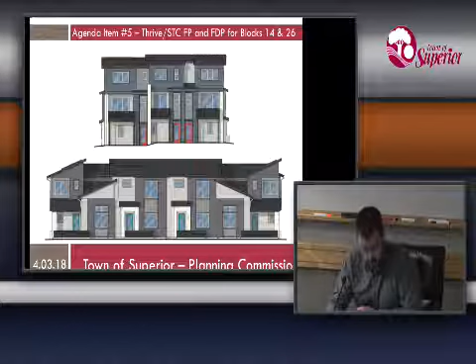Tonight's development application involves both final subdivision plats as well as final development plans for blocks 14 and 26 of the Superior Town Center. The images shown here are of each of the two product types that Thrive is proposing. Their 3-story stacked flat product is shown on top, and their 2-story courtyard design is illustrated below. Chase Mullen, our 3D imaging consultant, is here to walk Planning Commission through the 3D massing model that he's created after my presentation. The applicant, Jay Garcia of Thrive Homes, as well as his design consultants, are also here with a presentation of their own that'll follow Chase's fly-through.

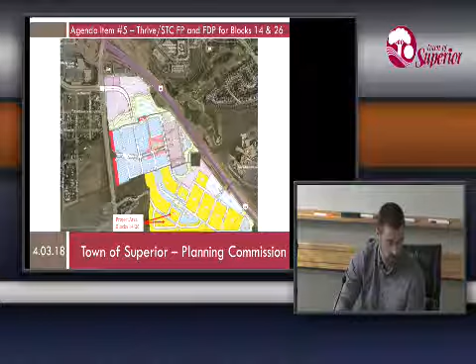The subject property is located within Planning Area 3 of the town center. As illustrated, blocks 14 and 26 lie along each side of Discovery Parkway as it comes south into the town center. Block 14 lies south of Promenade Drive between Village Greenway and Central Parkway. The proposed development area within Block 26 lies along Discovery Parkway just south of that right-of-way. The area reflected in yellow within this land use map illustrates the PD3 designation for residential, which includes the allowance for this development, including Block 14 and 26.

The land use map from PDA 3 also clarifies that the platting portion of this application was anticipated during the 2016 update, as streets 9 and 10 were approved to be added as public rights-of-way in order to accommodate the development of blocks 26 and 27.

As reflected in their context site plan on the right, Thrive is only proposing to develop the northern half of Block 26 at this time, in addition to all of Block 14. The associated plat for Block 26 has been confined to platting the right-of-way for Central Park Circle, which is the name that's been applied to Streets 9 and 10. The remainder of Block 26 and all of Block 27 will require additional subdivision plat or plats, which will be processed with an application for the development within these blocks.

The subdivision request for Lot 1, Block 14 would divide this 1.47 acre block into 32 developable lots comprising 1.05 acres and 3 outlots comprising 0.42 acres.

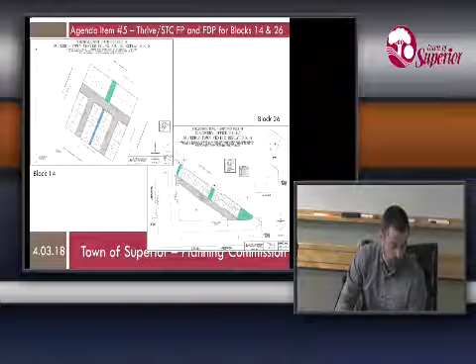The subdivision request for Block 26 is presently Super Lot 4, which encompasses a 5.78 acre area. They're proposing to divide a smaller portion of that into 19 developable lots covering 0.66 acres, as well as 4 outlots covering just over half an acre. The two super lots that will remain will be the remaining portion of Block 26 and all of Block 27.

The request for Block 14 would yield a density of 21.75 dwelling units an acre. As illustrated, lot sizes range from 784 square feet to 3,067 square feet.

The larger lots are sited along Promenade Drive and will front Village Green Park to the north, housing Thrive's courtyard units. The smaller lots to the south will accommodate Thrive's stacked flats, and they are aligned to face northwest or southeast, either to the adjacent public right-of-way or to the internal path illustrated in blue as Outlot C.

The proposed replat would create 3 privately owned lanes: Meridian Lane running parallel with Promenade Drive, as well as Anticline Lane and Canal Lane, which parallel Village Greenway and Central Parkway. All of these lanes are proposed to be within Outlot B, shown in gray. The other outlot, shown in green, is Outlot A. Their primary purpose is to provide a pedestrian connection through this block.

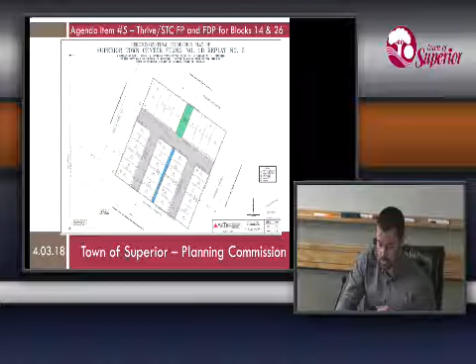The subdivision plat for Block 26 proposes to divide Super Lot 4A into Blocks 26 and 27, respectively, on each side of the proposed right-of-way. The northeastern half of Block 26 is proposed to be divided into lots 1 through 19 and outlots A through D to allow for Thrive's development.

The total density of this development would be 16.23 dwelling units an acre, and lot sizes would range from 1,040 square feet to 1,906 square feet. Each of the 19 lots proposed would front Discovery Parkway and be served by the private alley to the back, titled Incline Lane.

The other outlots, shown in green, are on each building corner and then kind of centrally located again to provide a pedestrian connection to Discovery Parkway.

The FDP cover sheet includes the required submittal components, including project title, legal description, vicinity map, and signature blocks, as well as the sheet index.

It also includes several tables that outline various development components. The site data table, enlarged on the right, clarifies the land use distribution and the proposed setbacks and building heights.

Both housing types as proposed will fall within the 32-foot height maximum. The courtyard model illustrated on the bottom left will be roughly 27 feet in height and 2 stories above grade with a basement. The stacked flat product illustrated on the top right is 3 floors in height and will stand 31 feet 7 inches tall.

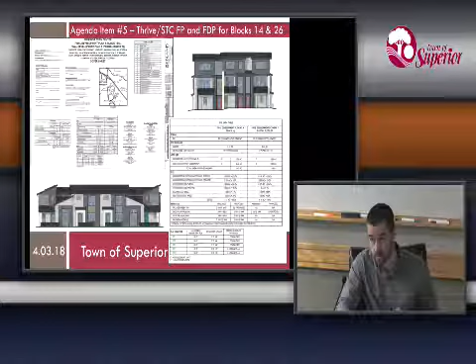Parking tables were also included on this cover sheet to clarify both the number of private garage spaces and guest parking spaces for each development block. Both product types proposed have a 2-bedroom unit with a loft area. 1.5 parking spaces are required for 2-bedroom units within the town center.

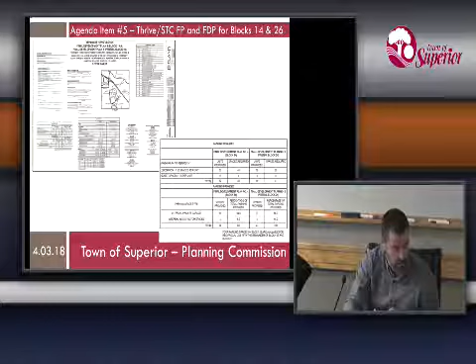For the 32 residential units proposed within Block 14, 60 garage spaces and 4 guest parking spaces are proposed, compared to a requirement of 48 private parking spaces and 4 guest parking spaces, so it exceeds the standard. For Block 26, 37 private parking spaces are proposed and 6 additional guest parking spaces, against a requirement of 29 private spaces and 2 guest parking spaces. So for both blocks, they exceed their parking requirements.

A context site plan is provided to illustrate the broader context of how the 2 blocks relate to one another as well as to their surrounding area. Vehicle access to these blocks would originate either from Main Street off McCaslin through the town center, or off of Discovery, which is a little bit more of a direct access to this area of Planning Area 3.

Street and infrastructure FDP approvals to date include all of the adjacent residential or adjacent roads. As illustrated on this plat sheet, vehicle access to Block 14 would come off of either Village Greenway or Central Parkway in these locations, or one of 2 locations off of Discovery Parkway. Access to Block 26 would come off of Central Park Circle in these 2 locations. The plan sheet also illustrates the pedestrian and ADA access routes incorporated into the design.

For Block 14, accessible pedestrian routes encircle the property and have been accommodated within the central connection between or over Outlot C and Outlot A. For Block 26, it's just kind of circumnavigating the site. This outlot, as well as all of the residences along Discovery Parkway, rely on stairs to get up to them, so this route is there for pedestrians, but it's not ADA accessible.

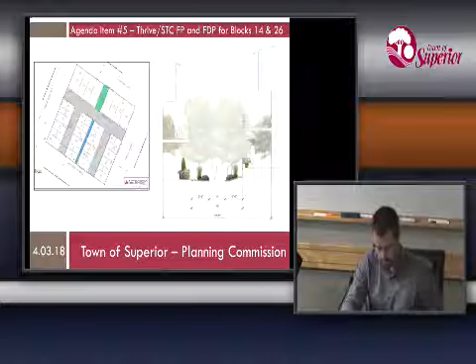Thrive's stacked flat product, which abuts Village Greenway, Central Parkway, and Discovery Parkway, is subject to the 2-foot to 8-foot right-of-way setback. Lots fronting Central Parkway are requesting a minor deviation to this setback for an additional 6 inches, to accommodate an electric easement that runs along that edge of the block. They just need an additional 6 inches to get out of that easement.

They'll also use that to help take up some of the grade to get up to their building elevations for those lots. Lot widths within the stacked flat range from 16.5 feet to 27.5 feet. Only 4 of these units are proposed at the 16.5-foot width, which will feature one-car garages. The other 20 townhomes, as well as all of Thrive's courtyard product, will include two-car garages.

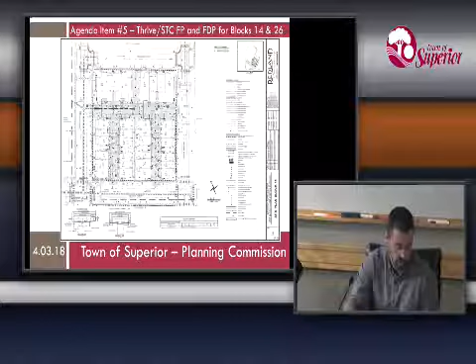The design of the private drives on Outlot B was based largely on fire access requirements, which require a 26-foot wide paved access, as well as 32 feet of building separation on those alleys.

The site plan sheet for Block 26 is shown here. It relates the same information that I just discussed for Block 14. Thrive is only proposing their smaller stacked flat units within this portion of Block 26. The plan sheet illustrates that the 19 units would be accommodated within 5 buildings: 2 with 3 townhome units, 2 with 4 townhome units, and 1 with 5.

Each building is designed to face northeast and front Discovery Parkway. Front setbacks are proposed to range from 16 feet to 24 feet 5 inches. The front setback standard for this area, again, is also the 2 feet to 8 feet.

An exception is being requested for this portion of Block 26 to account for an elevation variation between where the Discovery Parkway right-of-way was built and where the foundation grades are for their buildings. A series of stairs will be required to access each of these units. Staff has no concerns about this exception request, which was brought up at their concept plan meeting.

We've also worked with the applicant to assure that the front yards within these lots have been appropriately designed. Lot widths within Block 26 range from 16.5 feet to 30 feet. Only one unit along Discovery Parkway is proposed with the 16.5 foot width, which will include a one-car garage. The other 18 townhomes will have 2-car garages.

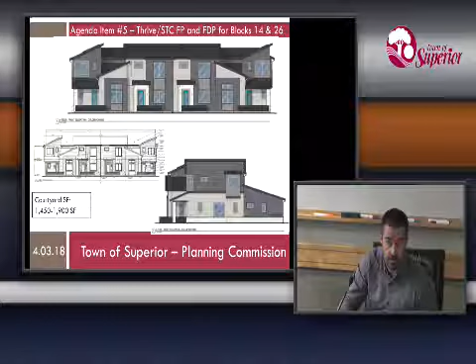The front elevation clarifies how the end units are distinguished from the interior courtyard product. Gable roof pitches define the interior units, while shed roof angles characterize the end units. The second floor shed roofs are also designed to accommodate solar panels. Stone has been incorporated around the building entries of the interior homes and is used to define the first corners of each building as well. Front building entrances in each courtyard product have also been incorporated.

The left side elevation here is virtually a mirror image of the right. The only difference is the utilities shown on each side elevation. On one end of each building, they'll cluster their gas utilities. On the other, they'll cluster their electric utilities for each of the 4-plex buildings. The roof elevation on the left, which will also face south, is shown to incorporate their solar panels as well on their black and white elevation.

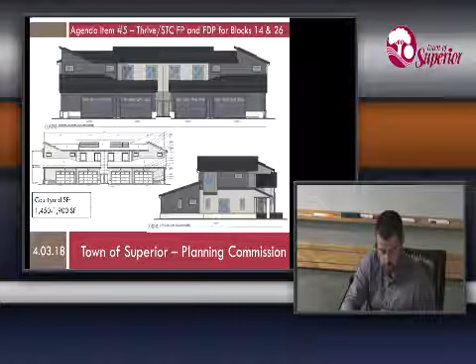The rear elevations illustrate that additional solar panels will be included on the interior units, and they also clarify how you get access to those interior courtyards, which is through a break between the 2 interior garages.

The 2 elevation plans provided for Thrive's stacked flat product reflect a 3-unit building cluster. For Block 14, only 3-unit townhomes are proposed, but within Block 26, Thrive is also proposing 4 and 5 unit buildings. Thrive's 3-story townhome would stand roughly 31 feet 8 inches in height, and have a depth of 40 feet and span roughly 60 feet in length in the arrangement shown.

The front building elevation clarifies the mix of colors and materials proposed. Stone columns have also been incorporated into this design. They help define the building corners and also separate internal units from external units. Stone has been included on the right side elevation as well. The second floor of this elevation features a bay window.

Like the courtyard product, Thrive's stacked flat includes 3 distinct composite siding finishes: a narrow and a wide horizontal lap siding, as well as a composite panel board siding. As detailed in the applicant's project narrative, Thrive would prefer to design their stacked flat product at a taller height of 35 feet 2 inches.

This design would allow for an enhanced solar exposure and provide each level of their 3-story product a more generous and welcome floor-to-ceiling separation. This request would require a minor 3-foot 2-inch exception from the 32-foot height restriction that applies to blocks 14 and 26, but their development would still be compliant with the applicable view shed restriction from Tract H. The visual impact of this allowance would be minimal from the exterior, but would result in a distinctly more spacious and marketable product from building interiors.

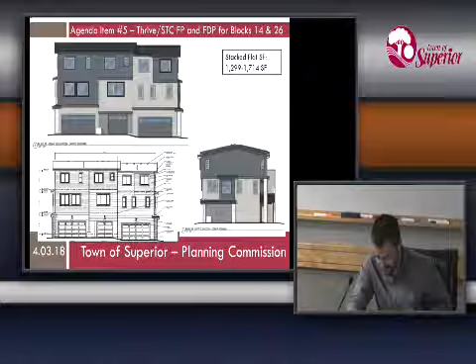Solar panels are not reflected on this elevation, but depending upon the orientation of the units, some stacked flats will have solar panels visible from building fronts, and some will have them visible from the rear facades. Staff has worked with the applicant to provide variation in wall planes on each of their elevations, shown here and here. But Thrive has also clarified that each protrusion runs counter to their company goal of maximizing energy efficiency of their products. So the proposal reflects the balance struck between the aesthetic appearance staff is concerned about and the energy efficiency that Thrive strives for.

The landscape plan shown here for both blocks illustrates the proposed landscaping within the defined area. The applicant has indicated a desire to expand on the design guideline plant list with additional plant varieties to better respond to the specific site conditions, such as shade and tighter planting areas.

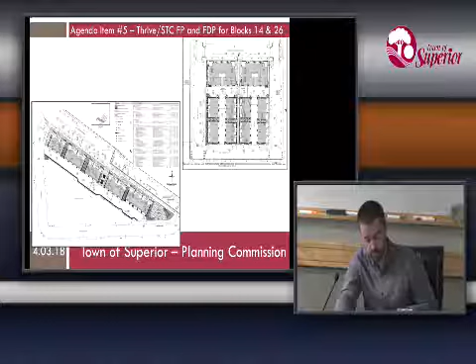A detailed narrative of each of their exception requests was provided by the applicant and reviewed by staff. In short, staff finds the landscape plan meets the overarching streetscape and landscape goals of the STC, which require that plant choices be attractive, sustainable materials, and support a vibrant and active public environment. Staff also finds the proposal will provide year-round interest in both form and color.

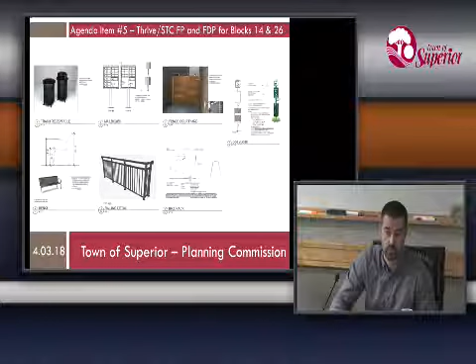The other site amenities are shown here. They're consistent with what we've seen elsewhere in the town center. Most of these are public amenities, with the exception of the fenced courtyard detail and the railing detail, which will be done on private property.

Staff is recommending approval of this application according to the conditions outlined here. As you know, should PC have any specific conditions to relate, they can be added to this list.

As noted in this presentation, Thrive is requesting a handful of exception requests to both setback and height. PC can respond to these requests directly through conditions or by directing staff to include PC's position on these issues through staff's written summary of this meeting that will be updated for the town board.

That concludes my presentation. We will turn it over to the more exciting stuff.

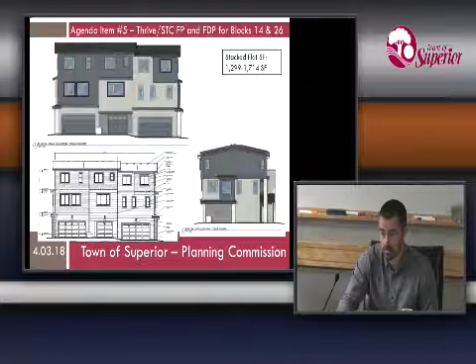All right, thank you, Stephen. Before we go on, though, we have questions for staff at this point in this presentation. Okay.

All right, is this our 3D? Okay, good evening, Chase Mullen with MIG.

I'll just do a kind of quick flyover and then ask for specific direction about views you guys would like. Just to help orient you, this is block 26 here, and this is 14 over here.

Those are at 32. What is the elevation gain just in the ground from on the south side of Central Park Circle? Does that grade lower? We don't have the final grading yet for kind of the 27 area, but I did absorb some of the grading from the road.

So it's close. Yeah, I mean, Central Park Circle is higher in elevation than those adjacent properties under consideration tonight. I'm just wondering, I can't remember if the grade -- this all slopes down to the north, and I'm assuming this does too. They had to pick up, and I don't know whether or not --

Jim Brostovich is the one working on the application. He's the civil engineer working on the application for Remington, which will come in with an application for blocks 26 and 27 later this year. My understanding is that the grade's higher south of Central Parkway -- Central Park Circle, excuse me.

They've clarified part of, that they're planning on coming forward with a front-loaded product off of Central Park Way, because they can't share that alley due to the grades. A lot of that grade change between the south side of Central Parkway and the north side, as well as what's on Discovery, is absorbed within the center of Block 26.

Anything additional? Would you be able to put the proposed development back in and give us that same view from the east and south that we had before, from the backyards of those homes? Yeah, I'll start on this end. Going up here a little bit.

Oh, that's perfect, thank you.

We'll keep Chase here just because we like his company. So if you guys have any other questions for him, we can follow up if you guys want to move to the applicant's presentation. Any more questions? I'll have questions for staff, but I'd like to hear that. Okay. Yeah, that's fine. Sure. Do we have a copy?

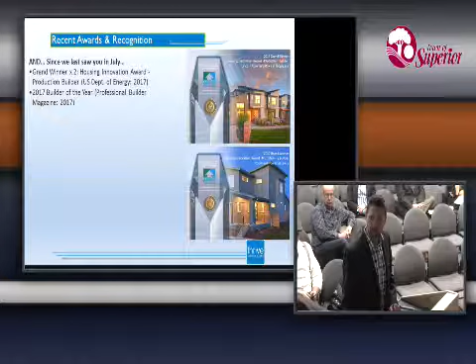We've won it the past 5 years in a row, but this is the first time we actually entered into 2 of the 4 categories, and we won them both. So we now have 6 awards. And then the other really exciting award is that Professional Builder Magazine named us Builder of the Year in the entire nation. So that was not something we actually applied for.

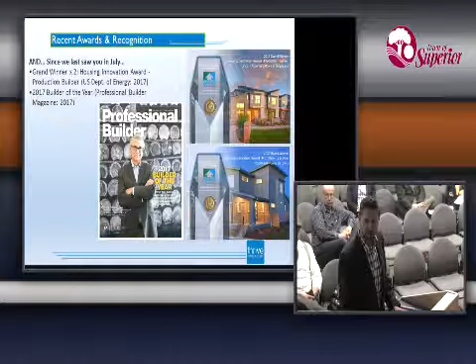We weren't trying to get this. They just kind of came out and told us, you guys are the Builder of the Year in the entire nation.

So what does that really mean, and how does that apply to this community? I think that we're really geared towards energy efficiency, sustainable power and energy, healthy homes and cleaner air, and what we focus on, what our pride is, the science of building.

So what does that translate to here in downtown Superior? It's going to be the sustainability that we're able to implement, high design, urban density, and walkability.

And why downtown Superior? I think it kind of goes without saying, but it warrants mentioning. Just the focus on environmental stewardship being within the town of Superior, but also kind of trying to be that cutting edge of innovation as well. And then also the healthy living and how that integrates into and around the community itself.

So we're just really excited to be a part of the Downtown Superior project. It's cool to go out there now and just see how it's started to take shape even since last July. And, mentioned this last time, but downtown Superior, the town of Superior in general, being 2017 best place to live in Colorado, as labeled by Niche.

And what I think is really cool is that the town of Superior has these goals out there for sustainability, for environmental stewardship. Not every municipality or jurisdiction is willing to just put this out there like that and have their goals labeled on the website itself, and have a robust green building program. They have these initiatives and programs that they're seeking to launch to be acknowledged as being a solar-friendly community.

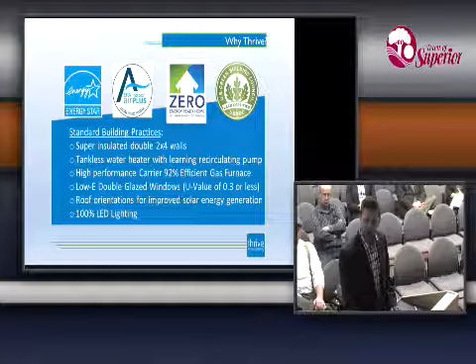So this is very approximate, and I have to throw out the disclaimer, but how we have these currently designed in the energy modeling software that we've run them through the science of building technology, we believe that these homes will score 32 or less on the HERS rating score, so I'll talk about that a little bit more in a moment.

Have over 20% reduction in energy usage as compared to the 2015 building code, which is the latest and greatest building code. Have actual negative CO2 emissions with the solar, over $700 a year energy savings versus existing U.S. homes, and then the average monthly heating and cooling cost of less than 15.

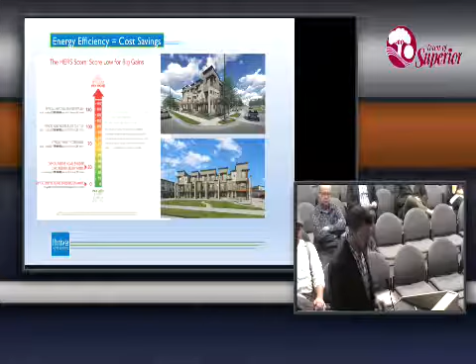A big disclaimer on that, but we think that it's actually going to be lower than that, but we just want to obviously assess the fact that this is still in the design phase. We want to see how it ends up being built, but it's pretty accurate software, so we're excited about it.

This is the HERS rating score, and we've kind of made it graphic just to illustrate the idea here. I don't know if there are any Masters fans in the house, but with the Masters coming up here, the lower the score, just like golf, the better.

So up here, the 130 that's kind of at the top of the chart there, that's a typical existing Denver resale home. This is the typical new home that's just built to code, so just the bare minimum and not be breaking the law.

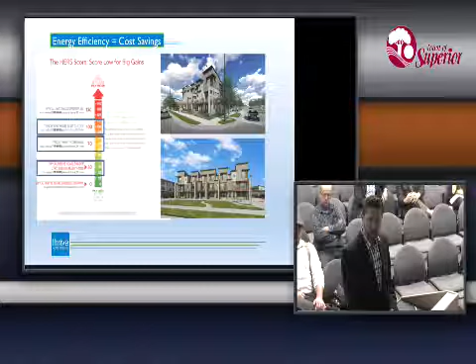This is an Energy Star home, which we plan to meet and surpass. And then this is where we're going to end up, right in that 30 range. This is a typical Thrive Home Builder zero energy ready home, which these are slated to become. So that's kind of the background on the design aspect.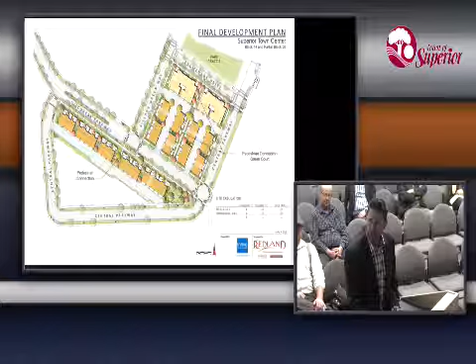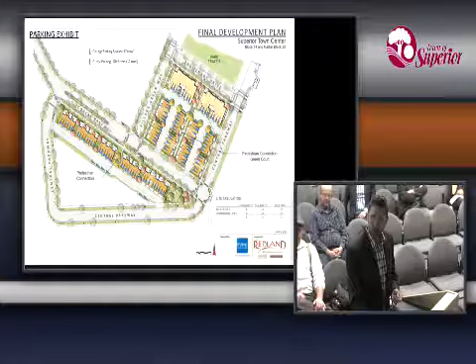Stephen did talk about the parking as well, so I don't necessarily need to go into the details of that, but this is an exhibit that just shows the actual garage parking and then the guest parking off street. So 97 total garage spaces and 10 off-street guest parking spaces.

These are the areas that have been designed and allocated for snow storage within the blocks themselves. This is the overall site data table, and I'm highlighting here at the bottom the setbacks in the areas where we're actually going to be requesting additional setbacks.

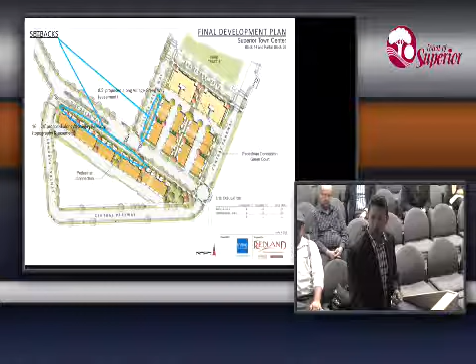Again, this area along here, there's a high voltage utility easement, a lot of energy going along that area, so we wanted to set back an additional 6 feet just for an offset of that easement. There is also an easement here, same easement, it takes a turn here, so it's that same 8-foot wide easement.

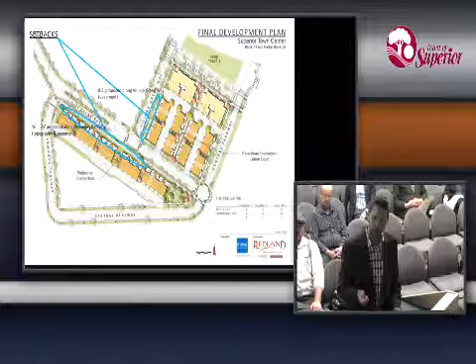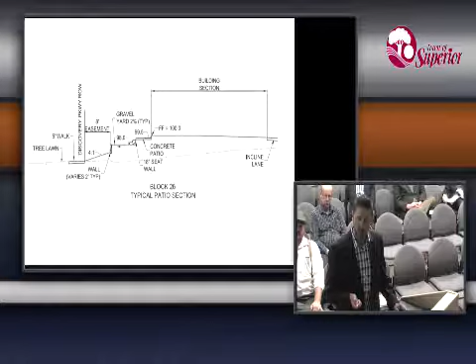But this is the area that we were referring to that has significant existing topography and ultimate grading buildout that will really allow us—here's an example of the typical setback from Discovery Parkway. It gives us this opportunity to step down, so we have these terraced retaining walls that then transition down to the street right of way and tree lawn.

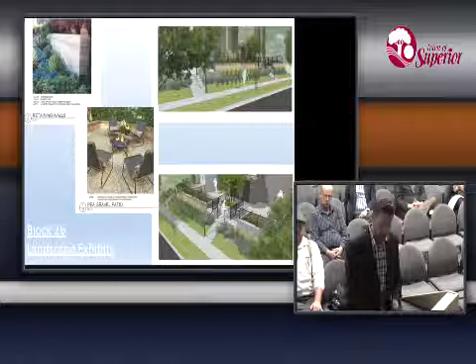And as Stephen alluded to, it gives us this real cool opportunity to extend the private outdoor living space for those units that front onto Discovery Parkway, have a fenced-in location where Fido can use the restroom, or you can program in some more active outdoor living for yourself. We took what was a site constraint and turned it into a design opportunity, and we're very excited about how that's going to turn out.

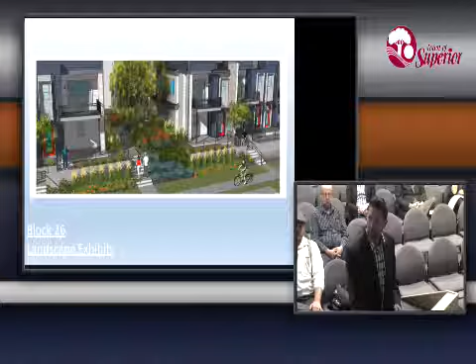I think that Chase's fly-through gave a good concept of it as well. This is just a general rendering that the civil engineer and landscape architect were able to come up with to give a feel for that area.

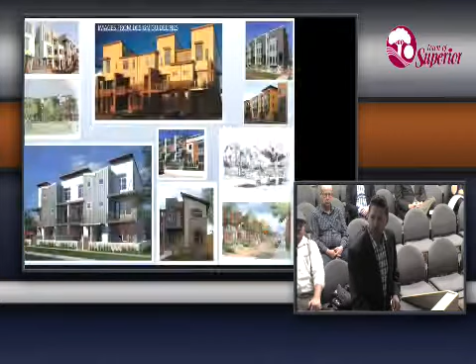Now I'll transition over to the architectural design. We began this process even before we talked to you last July, and delved into the design guidelines, and took a look at the different product types.

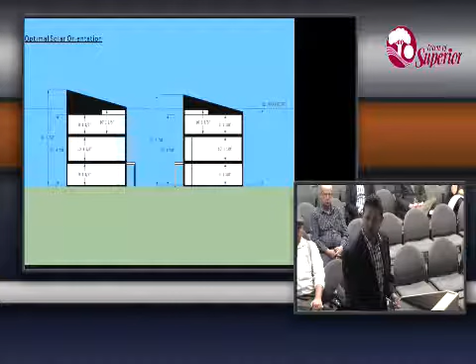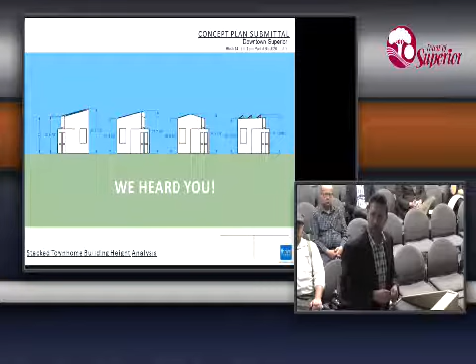As you may recall, we presented how this monoslope roof pitch offered optimal solar orientation, which gave us an opportunity to maximize the area of solar photovoltaic. We presented massing models showing that, ranging from about 38 to almost 40 feet in height, and showed different alternatives based on a maximum height of 32 feet. What we wanted to show you today is that we heard you, and we are progressing with what we heard that evening and since then.

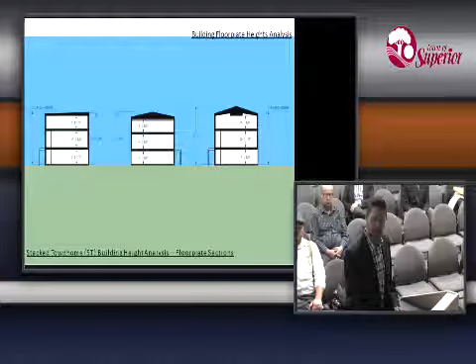We looked at various different product types. As far as height goes, we looked at the flat roof option. The flat roof is not ideal for a number of reasons, the least of which is not the fact that it isn't allowed by the guidelines. We don't think it's very aesthetic, and we don't agree that it fits in with the architectural feel established within downtown Superior.

This is the 31-foot, 8-inch building height with the gabled roof, which we believe is harmonious and in sync with the rest of the community, tying in with the surrounding area as well as downtown Superior. But as Stephen alluded to, there are significant sacrifices made within the interior of the home because of these squashed down roof heights and floor plate heights.

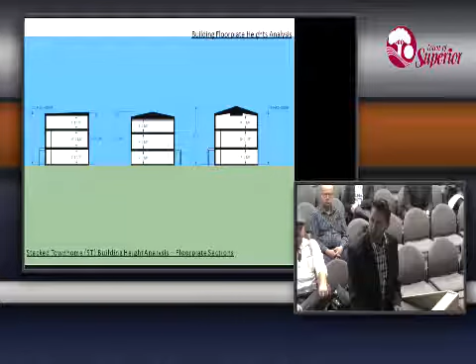So we've very carefully, down to the inch, designed what we think is a wonderful alternative that's still within the 10% administrative relief requirement. It has all these benefits and is really imperceptible when held side by side with that 35-foot, 2-inch building height.

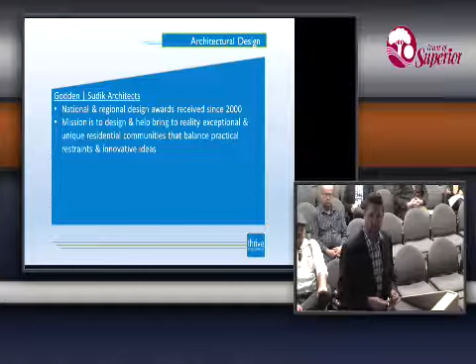So this is when we enlisted the services of Godden Sudik Architects, an award-winning design firm. They probably didn't know I was going to do this, so hopefully I can embarrass them a little, but they are both nationally and regionally recognized for their excellence in design. I put this up because we align with their mission and vision to design and bring to reality exceptional and unique residential communities that balance practical restraints and innovative ideas.

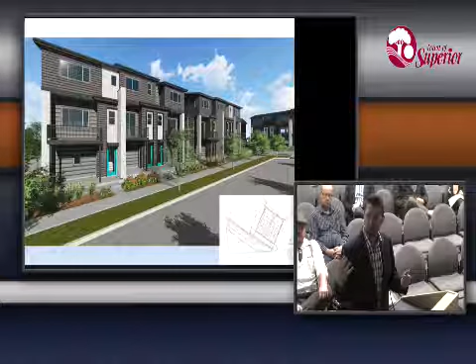It's beautiful, but it's really the composition of simple materials that come together and are articulated well, really breaking up that massing while providing a very livable floor plan at the same time.

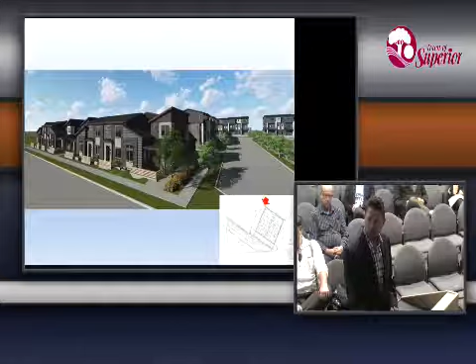So this is a view of Block 14, looking towards the south, and again at an angle. That's the two-story attached townhome, the courtyard unit with the basement, and that's the end unit with the main floor master being shown. This is looking back towards the back of that home, so you can see how the articulation wraps around the edge and ties into the adjacent structure.

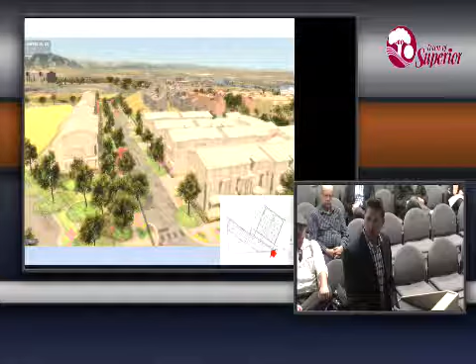Another bird's eye view here. These are some stills that Chase was able to share with us, which we thought showed a good example of the massing with its surrounding context, and the streetscape showing how we've integrated that topography as a design opportunity.

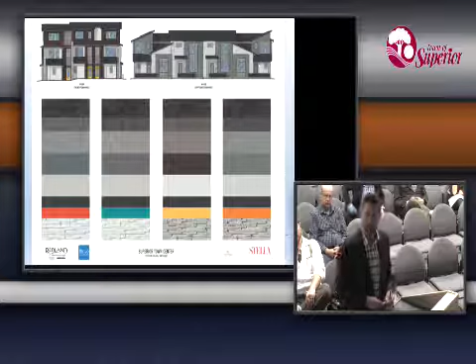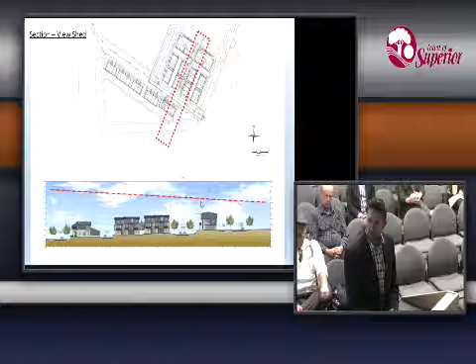This is the color and materials board. We actually have samples of the colors and materials here tonight to present to you all. And then the view shed, this is the worst case scenario looking back over the community, illustrating that view shed as a dimension. It's a good 20 feet below where that view shed is measured from, so we thought that was important.

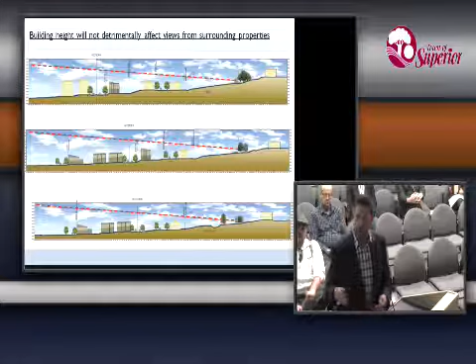This was shown, so you can kind of see here the orientation of the future massing that will be the Remington front-loaded product, and how we tie into that area. This is from the last time. This would be a gabled roof in these two locations, but it gives a good idea for the concept.

So why 35'2" in height? Basically what it comes down to, probably the biggest thing, is that home buyers and the market expect a certain floor plate and ceiling height, and it also allows for a lot more natural light to enter into the home, which is really critical for our open floor plan concept.

We can go into more detail here, but the higher ceilings really do enhance that open floor plan. It does improve the aesthetics, allows for larger windows on the exterior, taller doors, and by increasing the roof pitch, it gives it a little bit more residential character as well.

One of the big benefits is with an 8-foot garage door, we're able to accommodate most, if not all, vehicles, including ones with roof racks, and that allows them to stay off the street. If we were to shrink that first floor plate it would require a 7-foot garage door, and a lot of vehicles just won't fit into that size of a garage. The additional capacity within the garage allows for more storage as well.

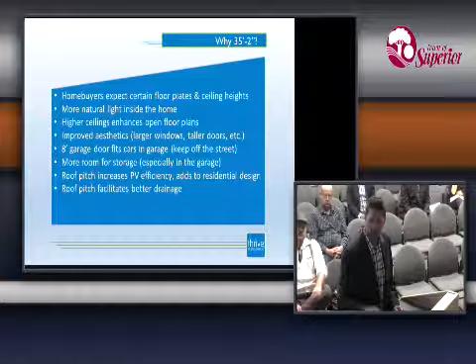And then, as I referenced before, the roof pitch not only increases the energy efficiency for the photovoltaic solar panels, but it also adds that residential design character. Ultimately, as far as buildability, warranty issues, and construction defect liability, it really facilitates better drainage for that roof, going from a 2-to-12 pitch to a 3-to-12 pitch.

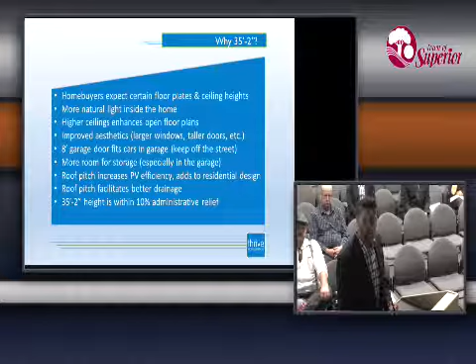And as I alluded to before, it's still within that 10% administrative relief that's built in. So we did that specifically—that was not an accident. We wanted to make sure that we were able to follow the rules. And ultimately, big picture, as Chase was able to allude to, it's still below that view shed, and it also ties into the surrounding community.

So with all that, I just want to say thank you. Stephen, you've been great to work with. That presentation was awesome. Chase, that was an incredible fly-through. I wish the 9-year-old version of me could have seen that back in the day because he would have gone bonkers, but that was really cool to be able to see that fly around. So at that point, I'd like to open it up to questions and see what we can answer for you guys.

Anybody want to start? Questions for applicant or staff?

I have a question related to height. I noticed that you came up with a new definition of height on the FDP, different than what's in the municipal code. There's a note regarding how height is measured on the FDP, on the elevation sheets. Understanding you need to establish different heights because you've got separate units if the grade is changing over time, rather than the traditional way you measure it with an average grade around the perimeter of the property—it sounds like you're measuring it from the top of foundation. Is that equivalent to, what is the difference between top of foundation and average grade? Are we seeing an honest representation of what the height will really feel like?

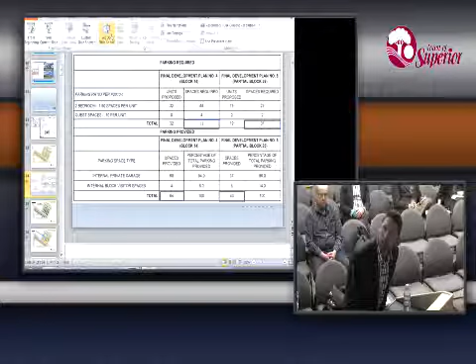So if we go here, yeah, that's the chart that I'm referring to. Okay, so...

This was what we're actually providing, and that's illustrated in the next exhibit. So there's internal private garage parking, 60 spaces on block 14, and 4 guest spaces. And there are 37 internal garage parking spaces on block 26, and 6 visitor spaces.

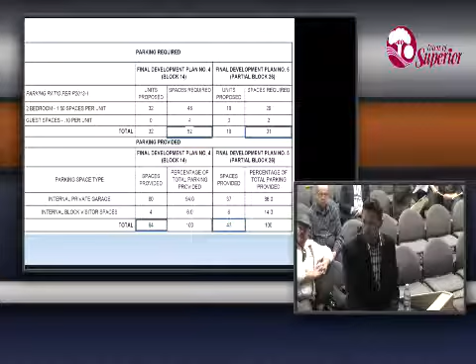This illustration shows the individual 2-car garages. There are 5 units that have what we call an oversized 1-car garage. We market it as a 1.5-car garage, but because it's so wide and large, it actually sufficiently provides additional storage in those units. Those are indicated with this slightly lighter shade of orange. You can see there's 4 here, and then 1 on this block as well.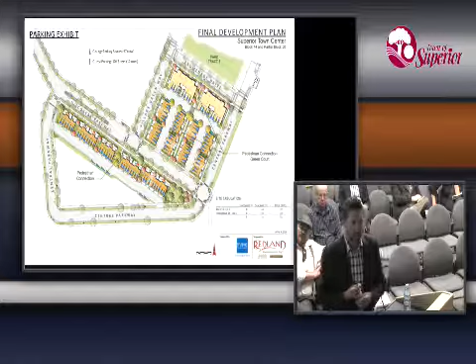As far as accessibility goes, there is not a specific designation for an ADA spot or an ADA unit, but there are several accessible units. These are the end units here on the 4-plexes. They're actually accessible units, at what's called a Type B visitable unit, which achieves 3 points for the Title IX Colorado Revised Statute accessibility requirements. There's a certain number of points you have to achieve for attached product.

And then these units here all have a 0-step entrance, as well as a visitable first floor powder room, which meets the requirements for Title IX as well. So as far as accessibility goes, this is an accessible route here to the mail kiosk, and this continues to be an accessible route to get you, and all the accessible routes around the perimeter of the site accommodate for ADA accessibility, including around the perimeter of block 26.

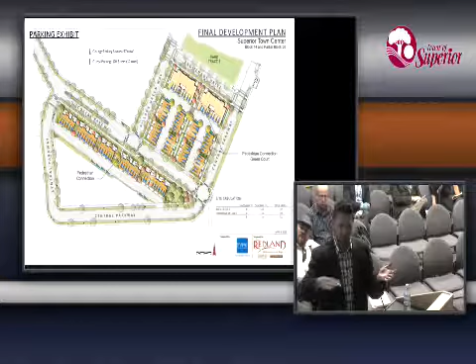That's one of the reasons why the topography has to happen gradually around the perimeter, so we can't take up as much within the site itself. But then there are stairs here, and stairs leading up to these individual units here. So the accessibility has kind of been addressed that way.

Did that answer your question? It does, thank you. And would you say the additional setback that you're requesting would assist with any of the accessibility at all, or does it not play a role?

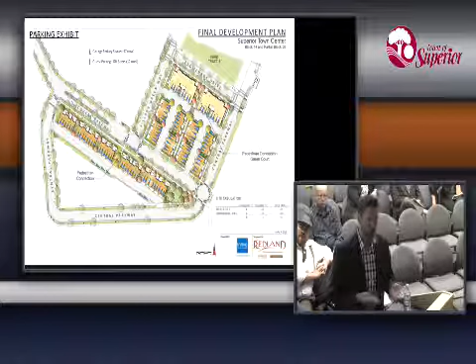Not really, just because these units here have significant steps, like 6, 7, 8 steps coming up to the unit. So you really can't get a ramp to achieve that, it'd have to be a switchback. It's more just to get a manageable grade, that doesn't turn into a sheer, gigantic retaining wall. We're terracing it in there and accommodating for some landscaping opportunities as well.

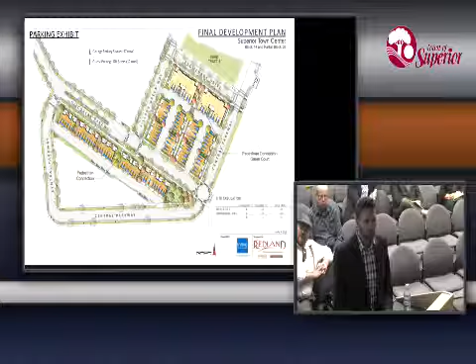Thank you. Yeah. A quick follow-up question, Steve: is there parking on the streets all around? Yes, there is. Okay, yeah, any other? I just had a few comments.

Mr. Garcia, thank you very much for your presentation, and Stephen Williams, that was fantastic as well. I'd just like to echo my colleagues' comments about the height restrictions in the town center, in that Thrive Builders went to the extent of hiring another architect to work in inches instead of feet, to keep these structures as low as possible, but still have the height inside the home that you need, to still be able to get the solar profile that you need.

You really took the time and spent the money to figure that out, and so I applaud you for that. I wanted to echo my colleagues' sentiment, because as we go along with this development, as other builders and other developers come in to build parts of the development, everyone's going to want to take an inch and push this a little bit further.

And to be able to turn back and say, well, look what Thrive did - why don't you go back to your architects and really look at this and come up with a different solution than adding 4 feet to the top of your structure, whether we're measuring from top of foundation to the highest point of the structure.

I understand the topography here is very tricky, especially in block 26, but I'd like to applaud you for that, and let the other builders that come into the town of Superior recognize that we're just not going to let people run amok with the heights, because it's very important. There are view corridors and everything from Waterford and the rest of the town center that are very important to us.

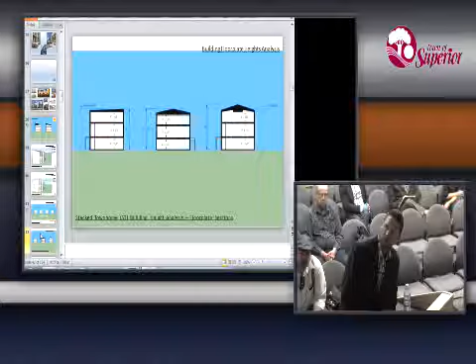I believe you're referring to this one? Yeah, I'm just having a hard time seeing the max height from this angle. Right, so it's this sort of dashed line here.

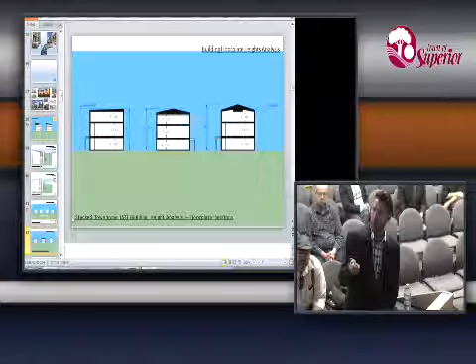So that's at 32. Correct. And then that's 35. Okay, to the third one there, that's got kind of additional dimension there. Yeah, I just can't read the numbers. Okay, yeah, all right, you can definitely zoom in a little bit more.

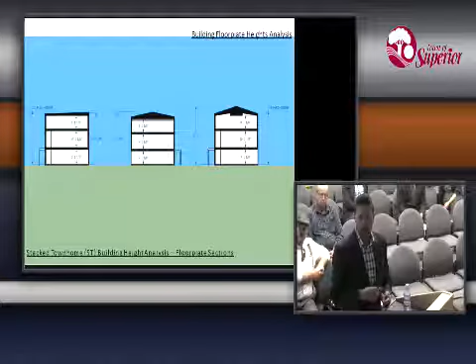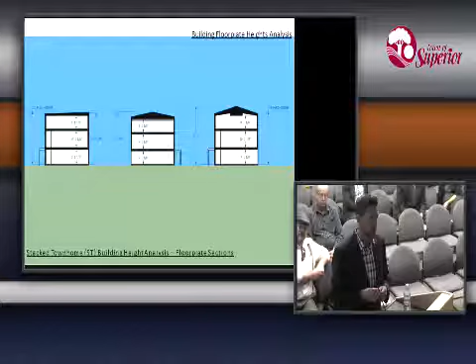See if this helps. So effectively, what you're able to accomplish - these heights here are consistent with the floor plate of what we just see in the market. I don't know if you noticed in the narrative I submitted, but Wonderland Homes, Remington Homes, the other two builders within the community, their floor plate heights, as well as some of the higher end local apartment complexes - it's just kind of what the market expects at this point.

We really see some benefits to the added foot - an actual 9-foot first floor, 10-foot second floor. This is really where we envision, from our past experience building these homes, where the most volume, the most living goes on - your kitchen and your living room, and your outdoor second floor deck. We'd love to have higher roof pitches, and we've tried to add to the volume with our design by vaulting some of that space and taking advantage of it.

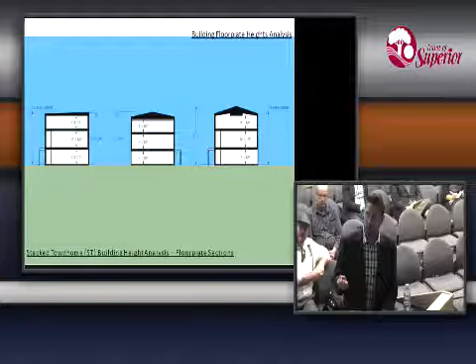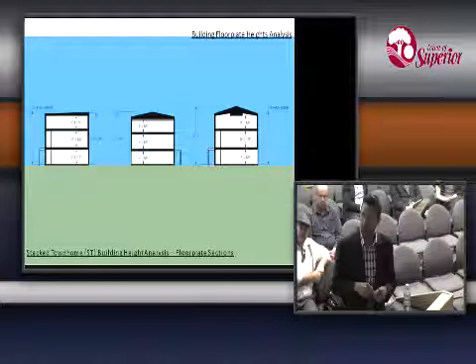It adds cost, but we do respect that we're trying to minimize any projection above that 32-foot height limit. So those are some of the things that we looked at doing.

All right, thank you. So just to add a little bit more context to that, the stack flat product really just has an entrance at the main level and a garage, so that's why you see the discrepancy between floors 1 and 2.

Jay mentioned that the maximum floor plate to ceiling height is on the main level, so that's your living area with your kitchen and your living area, and then the bedrooms are up top. But that first floor is really just for your garage and for kind of an entryway in this product, because it's fairly shallow.

Anything else? All right, and well, just one other thing, Mr. Garcia - you said you had materials for us. Yes, exterior materials. Yeah, we've got a material board over here.

So, the actual sample material board. There's the white stone, which has a really interesting profile—a bit of a mixed texture and then a smooth stone profile. So it really adds some character at the entrance.

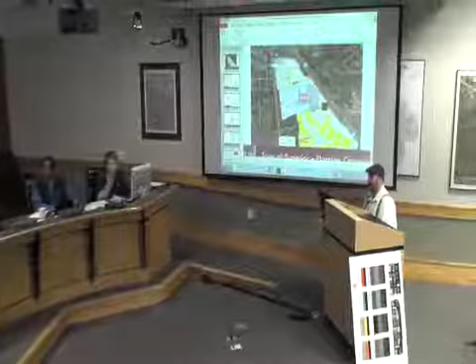So on the 32 feet, the variance of 10%, where does that 10% come from? Well, I don't think that staff would apply an administrative variance out here. That's why we've taken it to the board. But there is a provision in our code that we don't have to go back to a planning commission or board meeting if a proposal is within 10% of a requirement, from whatever was approved originally. So that's kind of where they came up with that number, but it's not anything we've directed, that you need to get within a 10% allowance. It's just a number that's within our code for administrative amendments to applications, a tolerance without having to have a full-blown variance.

Do you know where that's at? I'd kind of like to review it. It's in the code at some point, but yeah, I can send it to you. It's very convoluted, it references patio outdoor spaces for restaurants too. It's a strange section in our code, about what the town manager's allowed to do administratively. So it's not anything we would apply here, and that's why we require them to take it forward with that request as part of their FDP review.

And Stephen, why wouldn't you guys support it, since it's within your realm to support? It is within our realm, but because of the sensitivity of the issue and the neighborhood involved, and the fact that 32 was a pretty clear height requirement that was discussed, we wanted to go through this whole process publicly rather than deal with it administratively. Plus, staff has looked at this proposal, and site context-wise, I think Commissioner Ritchie said it well, I don't think there's going to be a negative offsite impact based on this within the context of the development and the surrounding development that's expected.